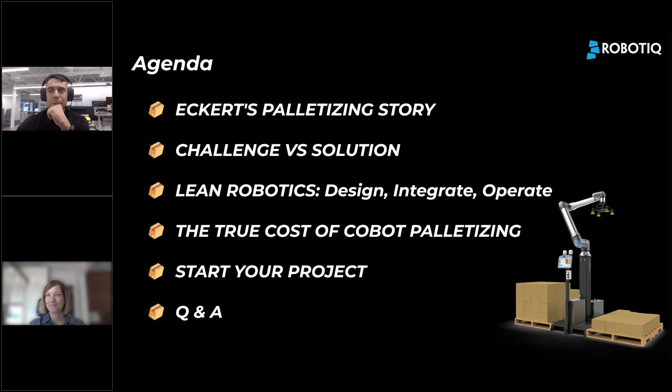Sounds good? So let's move on. Eckerts is a very small distillery company from Germany with 50 employees. They first started with one palletizer and quickly moved on to a second one, and Etienne will give us more details about their decision to move on.

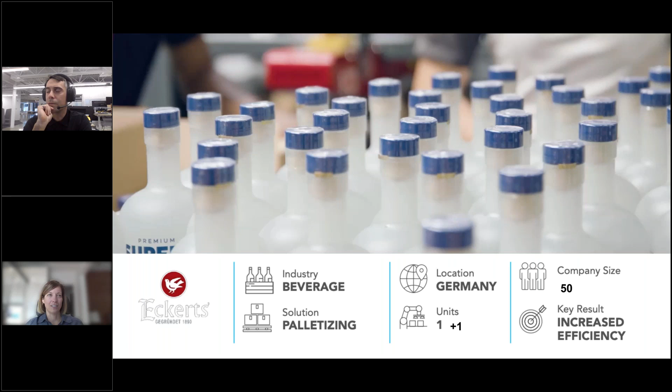What better than a video to show you who Eckerts is and how they use our palletizer. We'll show you a 2-minute video.

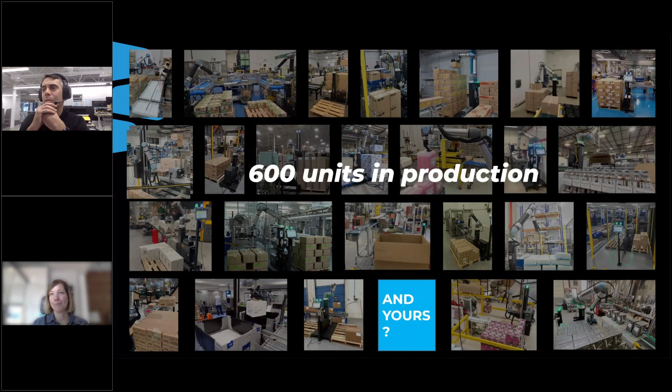So, Etienne, when we think of Eckerts, what were the main challenges that they faced that prompted them to stop doing their palletizing manually?

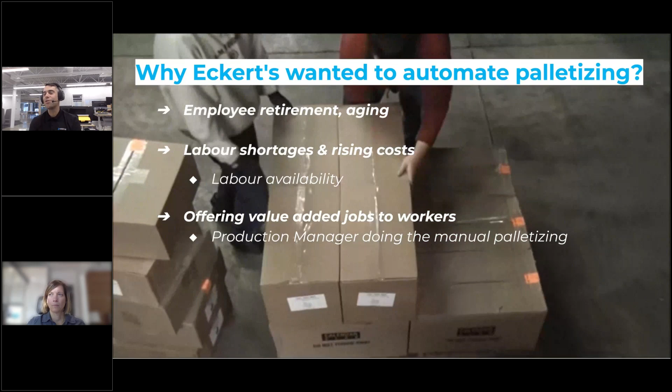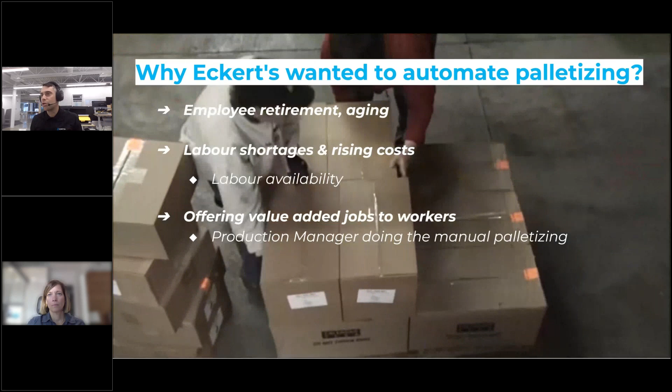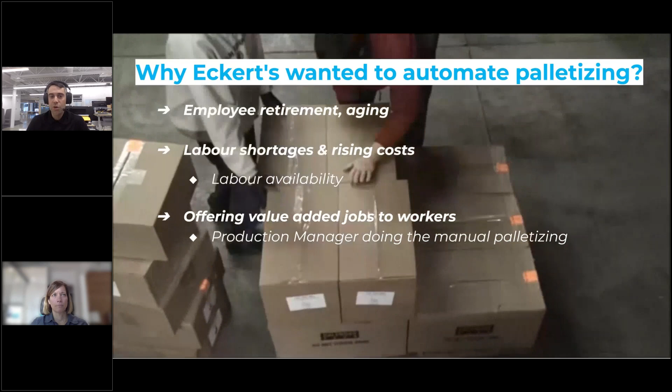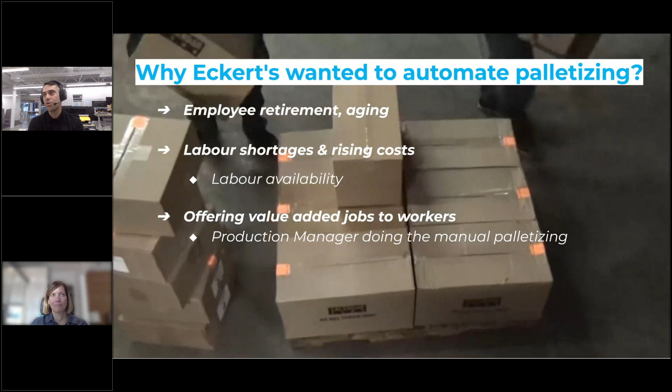Yeah, well, Eckerts, like you said, it's a small or medium-sized food business, beverage in this case. And like most of these types of companies, they have challenges with labor. We didn't see it in the video, but outside the factory it's really remote, green hills surrounding the factory, small village. So of course they have problems hiring. The workforce is aging, people are retiring, and the younger people they can hire just don't want to do this kind of manual task. It's really typical across pretty much all the regions we cover that food industry will usually be close to their resource. In this case, they're close to apples, so it's outside of urban centers. It's just tough to get people, so they need a solution for labor. That's really what's driving the project.

And when we talk about the project, what were the main challenges that you and your team faced to implement an automated palletizer from Robotiq?

Well, it's always a little bit different. This one was really easy, we have to say. So we have some content to show today because there's always a little something that we need to tackle, but it was an easy project. You will see it when we cover the cost of the project - the cost was not very high because it was easy.

One of the small challenges we had was to adapt our gripping solution for the boxes. For those who know a little bit about automation listening to us, you probably look at that box and say, 'Oh wow, that's really horrible.' The boxes were in poor condition for automation - the top is not very solid, you can see the cardboard bending and everything. That's really not ideal if you want to automate, so we had to make sure our gripping would be reliable. We had to adapt our standard gripper for that.

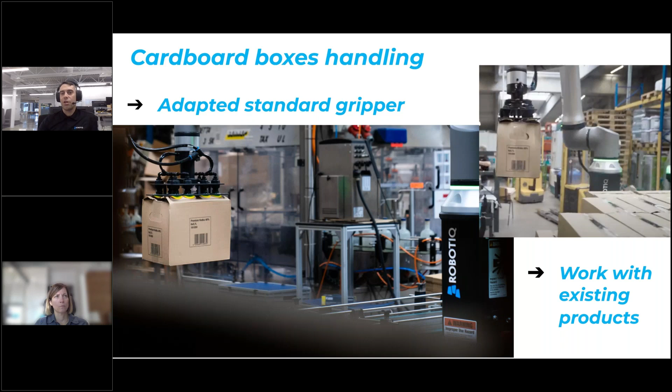So we had to tackle the tight space, but with a cobot solution like we have, it's really easy. It would have been a challenge with an industrial robot, but for us it was not a challenge. It's easy to deploy in such a tight environment.

Would you say, Etienne, that the floor space our palletizer is taking is larger or wider than when they did it manually, or was it about the same space that is now dedicated to the cobot versus the employees? Very good question. It's usually the same. Most of the time we don't have to move anything on the floor, we just install. You see the column in black in front of that person, that's our palletizer base, and the width of that is less than a pallet. So usually it fits where you have manual palletizing, and you don't need to move anything on the floor.

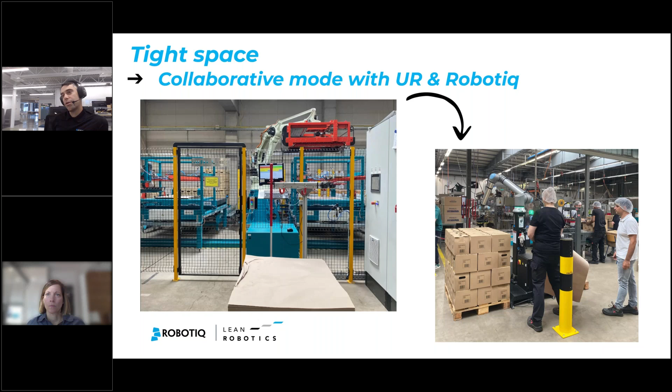Did you want to add something else on this? No, I think the next one is about the conveyors. That's what I was saying a bit earlier. That's the other small challenge that we have, that we had to adapt the conveyors of the customer. Go to the next slide and we'll see what I'm talking about.

We'll go into the project management process. The very first phase, with the lean robotics principle, is the design. So how do customers evaluate their palletizing project if they want to jump into cobots? Are we providing anything so they can have a fair estimate or evaluation? The first step is to check the feasibility.

And with our solution that's standard, it's really easy to do. You just go to our website and you have access to our online configurator. That's what you would use to de-risk your project and check if it's feasible. This configurator will also tell you what solution fits best your scenario.

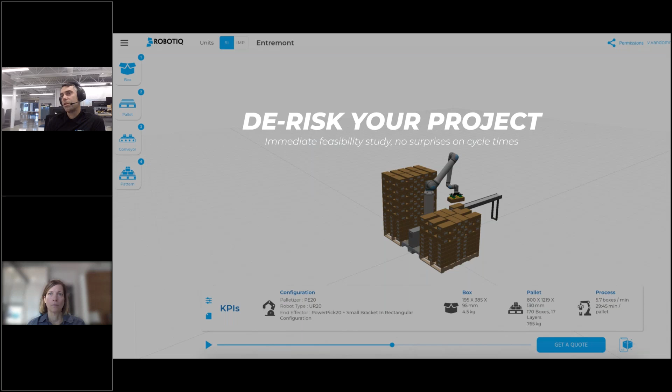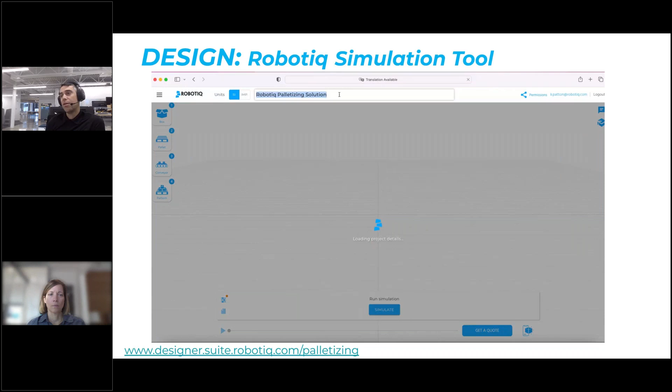Basically, what you need at the end is to know what you will palletize, so the boxes, you need their dimension and weight. That's what we're seeing on the screen right now. Then you need to tell the simulator what pattern of palletizing it will be doing, how many layers, how high you'll go, and then the conveyor: its position, how high, how wide, etc.

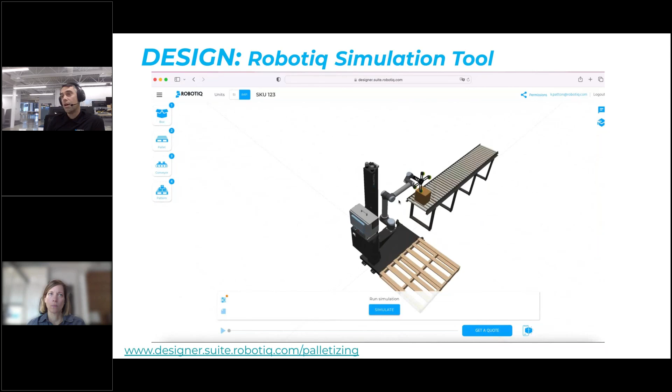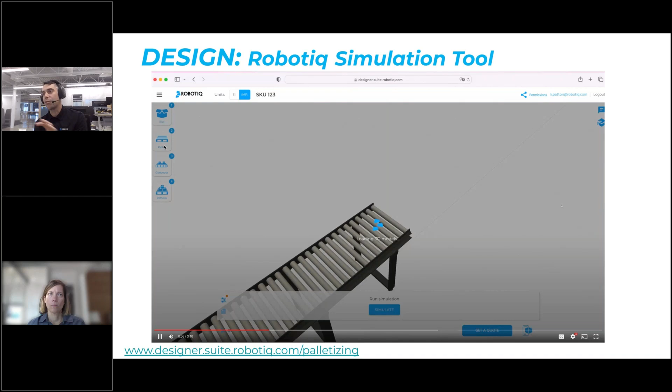Then the simulator will just do its magic and tell you if it's working and with which solution. It will also tell you what throughput you get, so how many boxes per minute you can handle. So with this, normally you'll be able to know if it's working, if it meets your requirement. I won't go into details because you can play with a lot of parameters in terms of speed, etc. But the default configuration is really the most common one we use, and you just put your box and pallet pattern, and it works. That's really the starting point.

Wow, that sounds easy to use actually. It is. After the project evaluation was done, what solution was selected for Eckerts?

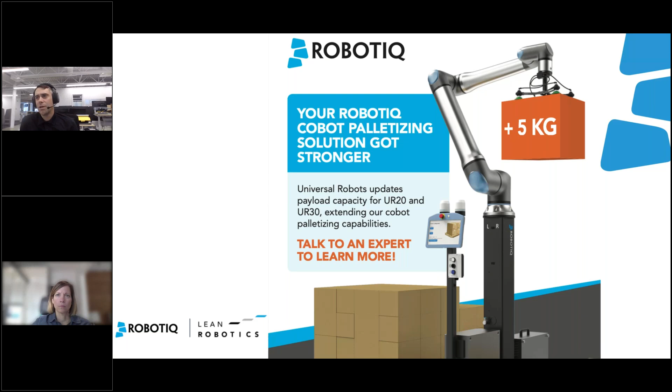Well, before answering, I'll take a step back to explain our whole line of solutions. We have a complete line of products since our last webinar. Since last month, everything has changed a bit because the payload has been increased on the UR robots we use, the UR20 and the UR30. They had a payload increase, and now they can lift 5 kg more. So the UR20 can now lift 25 kg, that's about 50-55 pounds for the Americans listening to us. And the UR30 is now up to 35 kg. This has changed our whole line of products.

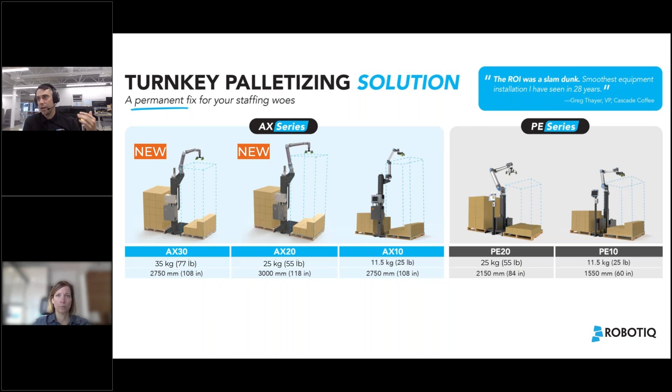And for Eckerts, that's what we picked, the PE20. The PE20 can now lift up to 25 kg, minus the tool weight, by the way. 25 kg is the payload of the robot; we need to take out the tool weight, so roughly 2 to 3 kilograms. So we can have boxes up to 22, 23 kg. More than that would be a challenge.

It's not very common to have boxes that are so heavy. The advantage of that is we can pick more than one box at a time. That's what we most of the time do to have better throughput. So if you have 10 kg boxes, you pick them 2 by 2, so you have better throughput.

That's the advantage of this payload. It comes with our software, which is the same for all the solutions I was showing in the previous slide. So all the different solutions have the same free software.

Our URCAP comes with the trajectory planning software, basically for the end user. So you just type in your box information, pallet information, and pattern, just like in the simulator, and the robot will automatically do its trajectories, pick the boxes, and place them. The only robot programming you need to do is to teach the pick position—show the robot where the boxes are—and everything else is automatic, the motion, all the logic with the HMI.

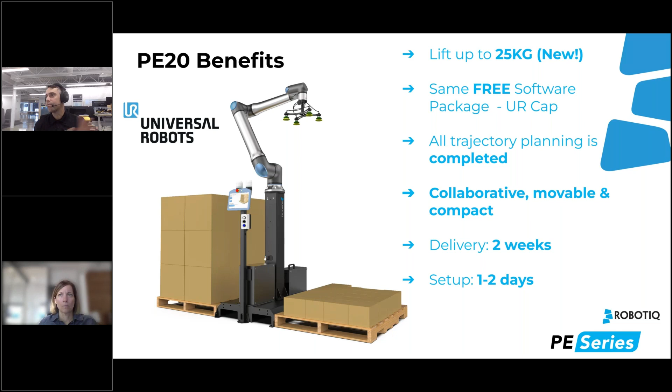Delivery and setup is just the same in pretty much all of our solutions. We deliver in 2 weeks, and we install—typically 1 or 2 days. Usually we have an extra day to give training, but that's really the typical thing.

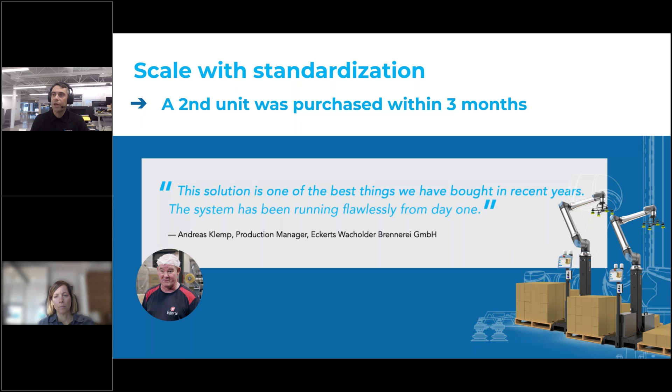With this project, for those who have good eyes, at the very beginning we showed the number of units—it was 1+1. We added the +1 recently because the customer Eckerts just ordered the second unit. It's really easy to scale when you have a standard solution like we have. Of course, when we installed the first unit, they had a small learning curve—they needed to learn how to use a new machine—but it was quickly adopted. Within less than 3 months, they ordered the second unit, and right now this fall we're in the process of delivering and installing that second unit.

So now, if we move to the phase of the integration, can you give a perspective of the timeline for the project deployment?

Well, this one was our record holder—basically the fastest, quickest project we did so far at Robotiq. To give exact dates: we met the end user at the industry event for the beverage industry specifically last fall. Then, of course, there's some back and forth of communication—what are you trying to do, how much it's going to cost, etc. So it takes a while to just settle the deal.

But we confirmed the order on May 30, if I remember correctly, and on June 24th we did the installation. So it's even a little bit less than 4 weeks from the order to the commissioning of the palletizer—the fastest we ever did. We're quite proud of that.

We got confirmation of a second order last month, and now we're going to install next month for a very similar application again. So that's exceptionally fast.

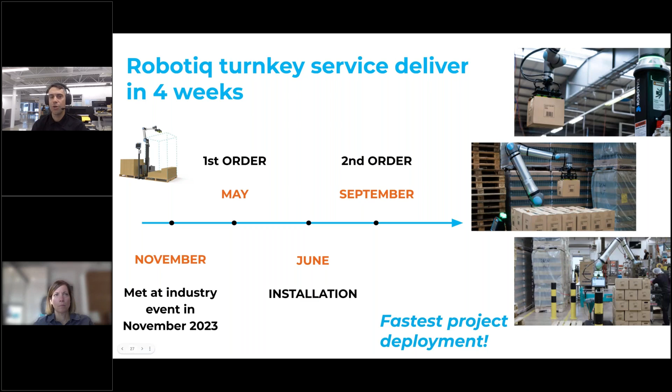Unless the project is really complex, the typical deployment is pretty much always like this. The first day is to set up, so assemble and install on the line. Assemble means take the robot and the palletizer out of the crate, put them together, and commission them on the line.

We bolt everything, we wire everything. That usually takes less than a day, about half a day. Then we start programming and make sure everything works. Normally after the first day, everything is working and we're ready to start pre-production on the second day.

The second day, I'll ask the customer to start production, and then we let the robot work. It's typical that we have to fine tune to adjust for inaccuracies, increase speed, or do any kind of fine tuning needed. So normally the second day we're actually in production, and at the end of the second day we just don't touch it ever again, and it keeps on working pretty much forever.

That's really quick. The third day we typically give training to our customers, like training for the operators on how to operate it, how to start it, how to load a recipe. It's common that they have multiple different recipes, how to change the pallet, basic troubleshooting. We also give more advanced training, usually to maintenance people, like how to do more advanced troubleshooting. There's not a lot of maintenance on the solution, basically changing the cups and cleaning filters, but we still need to show them how to do that.

So when it comes to operation, can you talk to us about the actual costs of automating an end of line? Yep, the cost — we'll see the cost calculation. They are really low. We'll also be looking at the return on investment.

It's saving on personnel, that's what Andreas, the production manager, is telling us. There's also the saving in terms of ergonomics, so you don't have people getting injured. That's a little bit hard to put numbers on.

So if we go to the next one, we'll see the cost and the return on investment. The return on investment is only based on saving employee cost, so we're not looking at all the other savings in terms of ergonomics and all of that.

A high production scenario would be running 3 shifts a day, 24/7. That's not the case in this business — it's a small business, so they just do a single shift and work just the weekdays. Nobody has to work on Saturday night over there. That's really good for them.